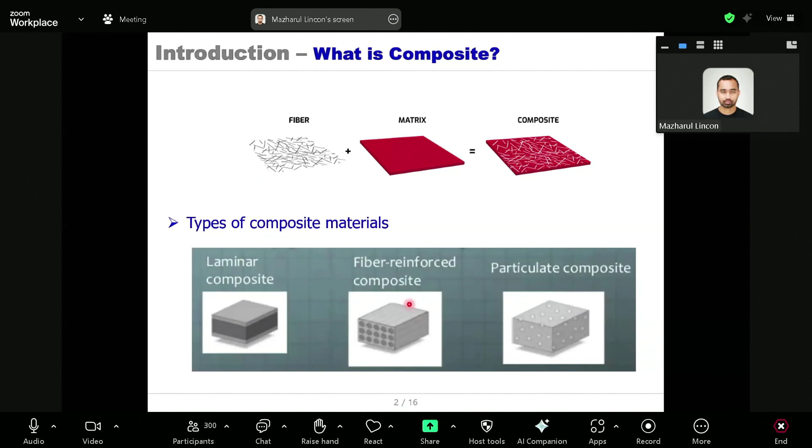In this study, we considered the fiber reinforced composite. Now, composite materials are becoming very popular in electronics, automotive, aerospace, and submarine industries.

Automobile structures and wheel rims are nowadays made by composite material, carbon fiber composite. In airplanes, composite materials are largely used - like Boeing 787, almost 90% of this airplane's body is made by composite material, carbon and fiberglass material.

And even in submarine industries, composite materials are gaining popularity. Super Falcon 3 submarine is made completely by composite material.

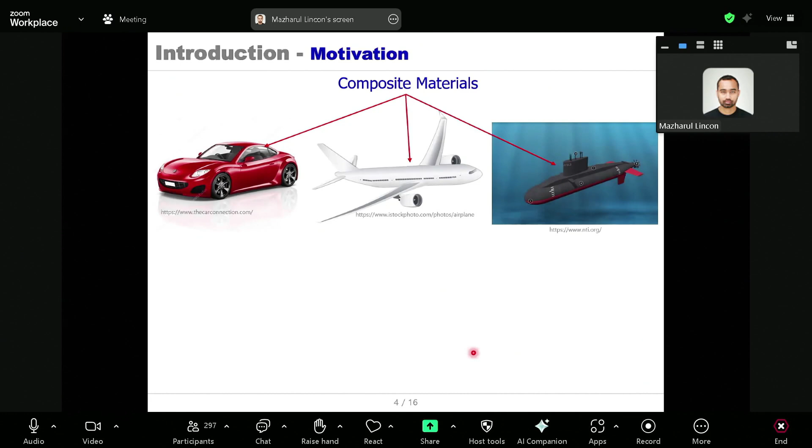Now, composite materials used in different commercial and defense applications demand superior performance under quasi-static, dynamic, and impact loading conditions. However, mechanical performance of composite materials can degrade in different ways.

For example, car accidents, bird impacts on airplanes, or water impact on submarines. So there has been significant interest in the recent past in continuous structural health monitoring of composite structures. This study will provide a better understanding of mechanical performance and damage monitoring capabilities of hybrid composites under dynamic loading conditions.

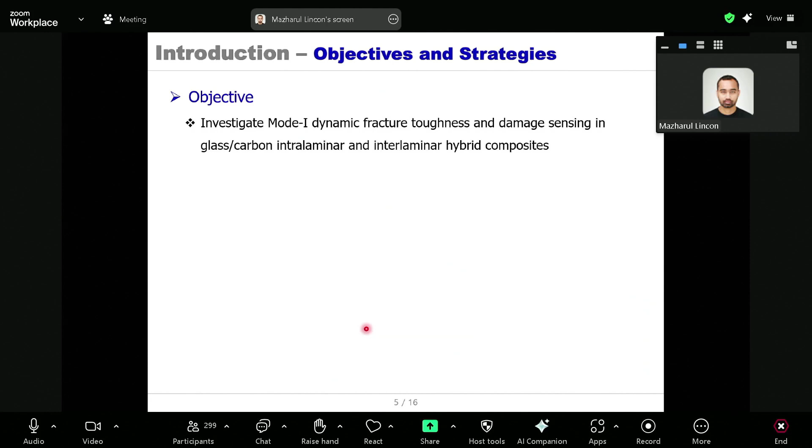The main objective of this research is to investigate mode-one dynamic fracture toughness and damage sensing in glass-carbon intralaminar and interlaminar hybrid composites.

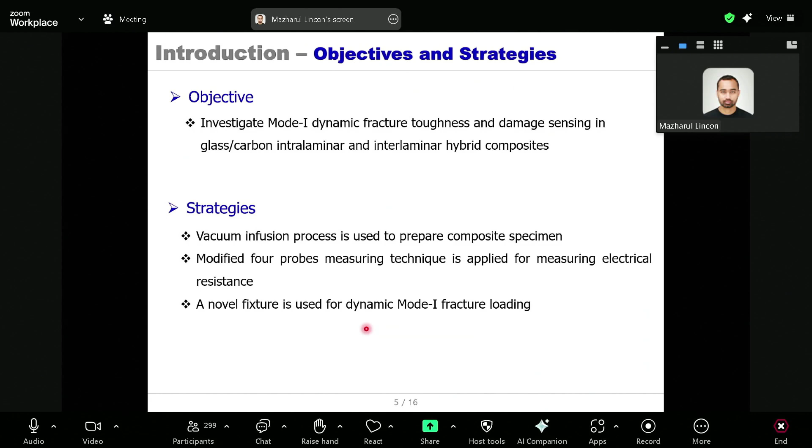The strategy we followed: a vacuum infusion process is used to prepare the composite specimen. A modified four-probe measuring technique is applied to measure the electrical resistance of the specimen, and a novel fixture is used for dynamic mode-one fracture loading.

Two types of hybrid composites are considered in this study: one is interlaminar hybrid composites, another is intralaminar hybrid composites. What is interlaminar hybrid composites? Interlaminar hybrid composites form between two different plies, glass ply and carbon ply, stacked one by one to create the hybrid composite.

On the other hand, in intralaminar hybrid composites, within a single ply, the carbon and glass yarns are formed evenly, and this even ply is stacked one by one to create the intralaminar hybrid composite.

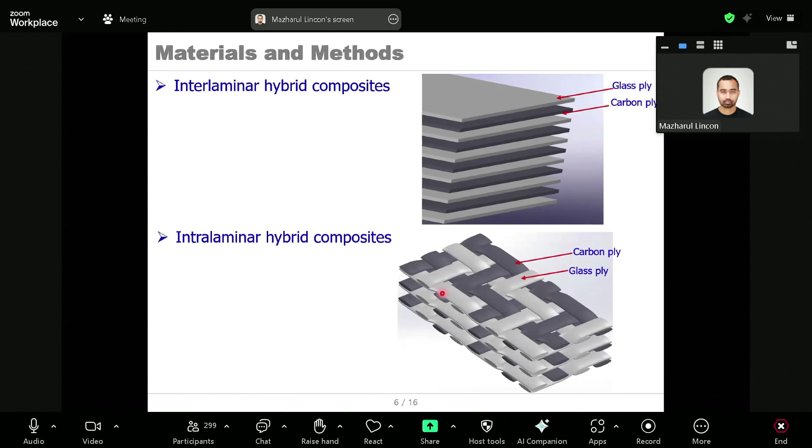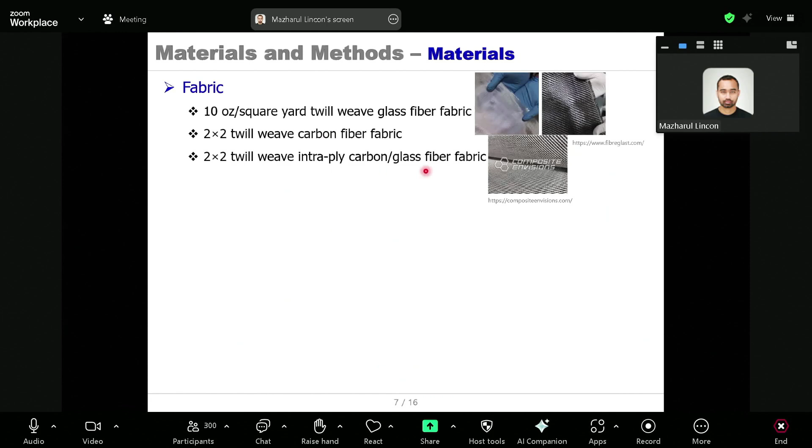The material used for this study is twill glass fiber fabric, carbon fiber fabric, and hybrid glass-carbon fiber fabric. The resin used is fiberglass epoxy resin and hardener. Multi-wall carbon nanotubes are used to make the interlaminar hybrid composite conductive.

Now the composite specimen making procedure. Here, vacuum assisted resin transfer molding process is used to prepare the composite specimen. This vacuum assisted resin transfer flow diagram is shown here.

This black one is just the Teflon board, and this gray one is the composite ply stack. This composite ply is covered with peel ply, flow media, and the vacuum bag, and the overall system is sealed with gum tape. From this inlet, resin passes through the composite specimen, and the excessive resin goes out through the outlet.

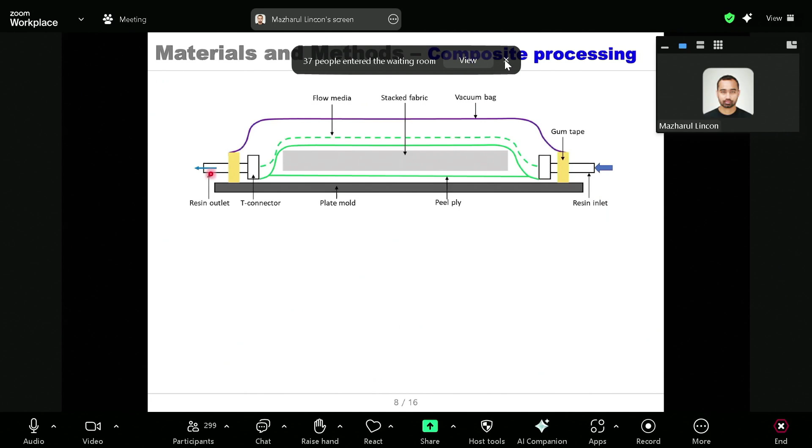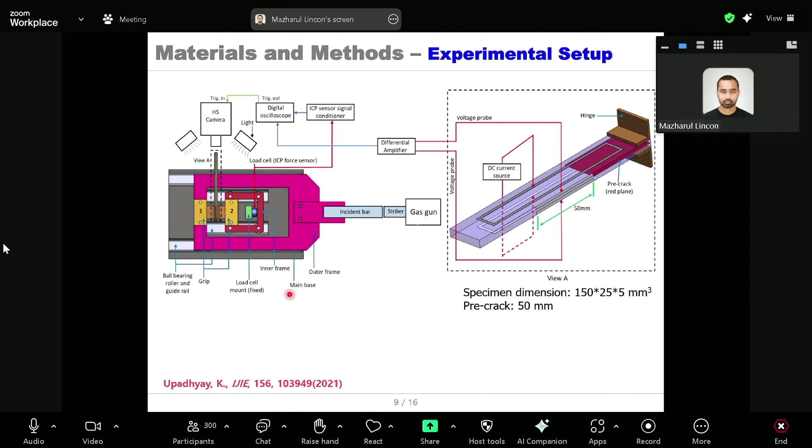The crack initiation toughness force is measured through a force sensor. This blue schematic diagram is shown as a sensor, and a high-speed camera is used in front of the fixture to capture the whole incident.

Now this is the schematic of this fixture. This is the outer frame, then this is the DCB specimen. One end of the DCB specimen is attached with this outer frame, and another end is attached with this inner red one frame. And this gray one is a projectile.

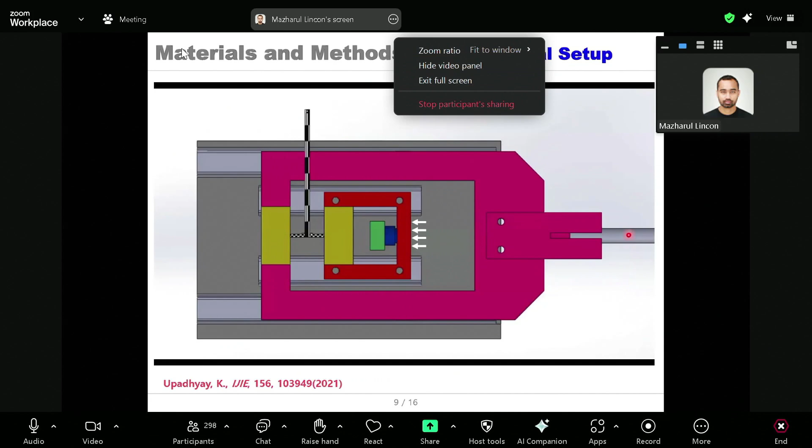When this projectile hits this outer frame, it starts moving, and it creates the opening of this DCB specimen. During this time, this inner frame also tries to move, and it creates force on this blue load sensor. This load sensor is connected with the oscilloscope, which captures this load, which is actually the fracture initiation toughness.

Now, this is the real image of this fixture, and this is the whole entire setup. This is the high-speed camera, oscilloscope, and the fixture and the specimen.

Now, this interlaminar hybrid composite, we use two types of interlaminar hybrid composites. One is G-inter, another one is C-inter. The basic difference between these two specimens is these specimens are made by a total of 10 ply, and the middle ply is glass fabric. In the C-inter composite case, the middle 2 ply is carbon fabric.

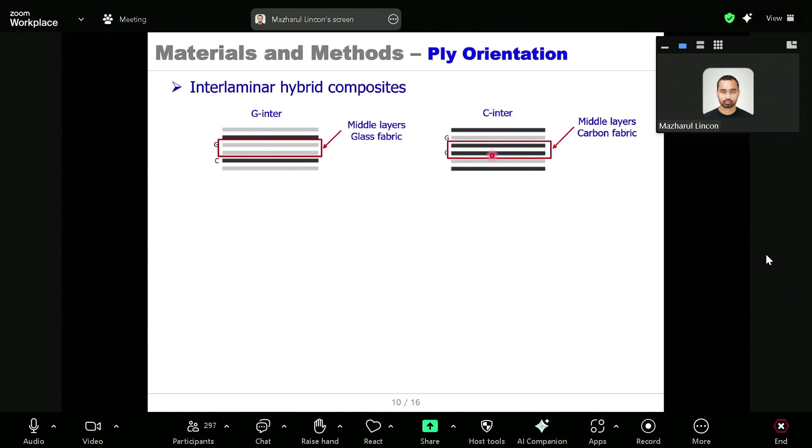For this intralaminar hybrid composite, 4 types of specimens are considered. The first one is G0C90. G0C90 means the glass yarn will be parallel to the crack initiation direction. The opposite is G90C0, here carbon yarn is parallel to the crack initiation direction.

Another 2 types of specimens are used, G45, C45. The basic difference between these 2 specimens is both yarns are in 45 degree direction in the crack initiation.

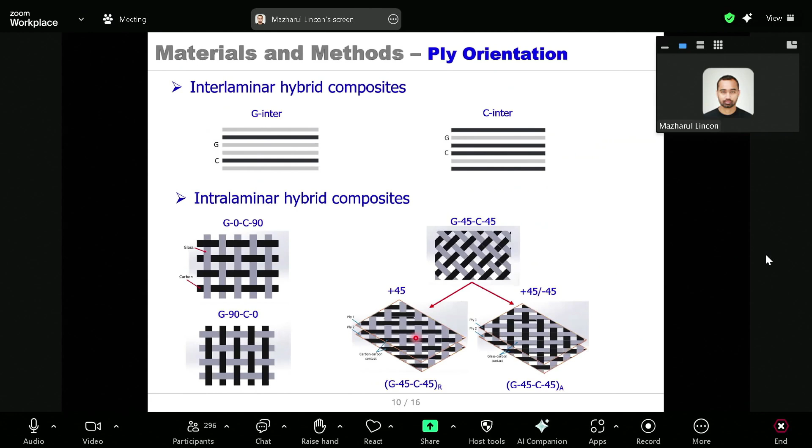Now I will discuss some key results of this research. We did both dynamic and static experiments, but in this presentation I will focus on only the dynamic results.

Here are the 4 types of intralaminar hybrid composites. G90C0 shows the highest fracture initiation toughness. On the other hand, G45, C45 alternating shows the lowest. Between the interlaminar hybrid composites, G-inter shows the maximum fracture initiation toughness compared to C-inter.

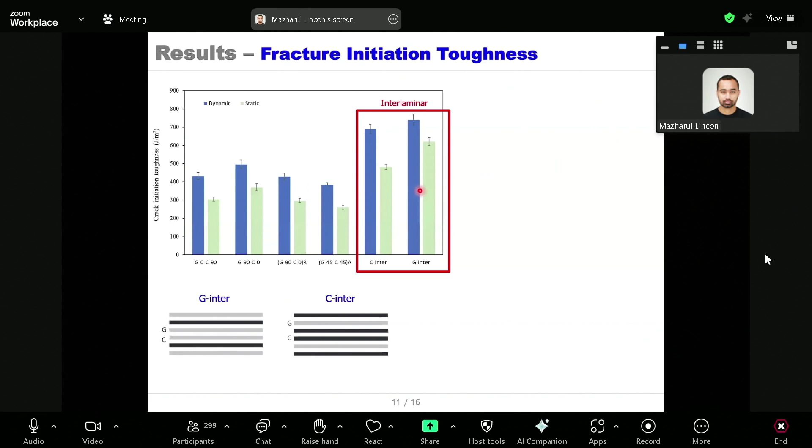Now the question is why the fracture initiation toughness varies among the 4 intralaminar hybrid composites as well as interlaminar hybrid composites. To find out the reason, we did scanning electron microscope analysis on the fracture surface of each composite. This is the scanning electron microscope images of 6 types of composites' fracture surfaces.

The first one is intralaminar G90C0. Here, carbon fiber breakage is the predominant failure mechanism, and this carbon fiber breakage is actually the main reason for showing the high fracture toughness for this composite type.

On the other hand, in this G0C90 case, glass fiber breakage happens as well as fiber-matrix debonding and matrix cracking. However, no carbon fiber breakage is observed in this composite type. As we know, carbon fiber needs much higher load to break than glass fiber. That's why this G0C90 composite shows less fracture toughness value compared to G90C0.

Now, another 2 composite types are G45, C45 repeating and alternating. In these 2 composite cases, the carbon yarn and glass yarn are at 45 degrees through the loading direction, and this 45 degree layup is not an effective orientation to carry higher load. That's why with a smaller force, the carbon fiber or glass fiber breakage happens because of this ply orientation, and that's why it shows less fracture toughness compared to the first 2 composite types.

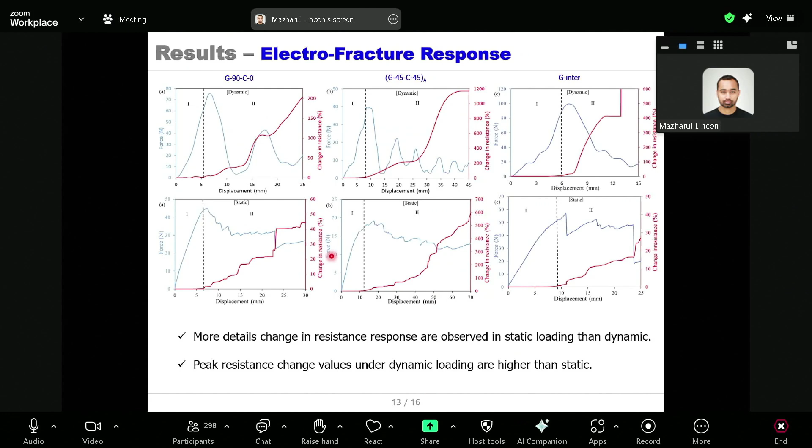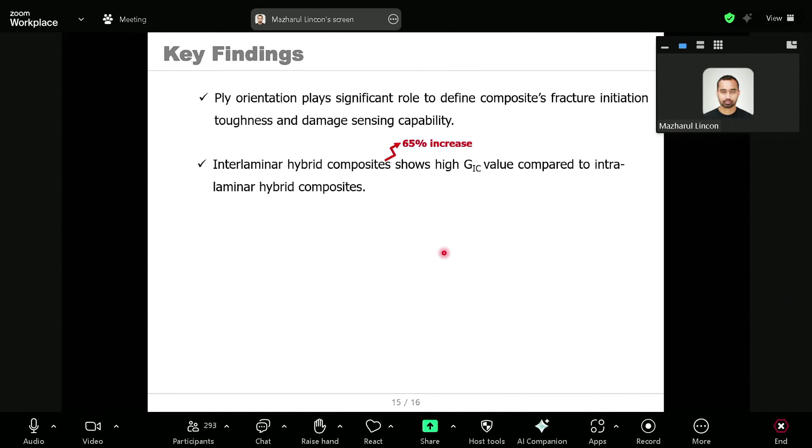The key findings of this research show that ply orientation plays a significant role in defining composite fracture initiation toughness and damage sensing capability. Interlaminar hybrid composite shows high fracture initiation toughness compared to intralaminar hybrid composites, around a 65% increase, while intralaminar hybrid composite shows better damage sensing capabilities, around 800 to 1200% change in resistance. The proposed modified four-probe method can predict crack initiation and propagation accurately for all composite types.

In this research, we use intralaminar hybrid composites. The main advantage of this composite is we don't need to use carbon nanotubes to make it conductive. We can use this composite directly in any damage sensing structure, and analyze the damage sensing capability for structural health monitoring. Carbon nanotubes are very hard to disperse uniformly in resin, making it difficult to create a uniform conductive specimen. But this intralaminar hybrid composite can itself create a good conductive network.

This intralaminar hybrid composite, for G45, C45, 45 degree orientation ply, shows very good damage sensing capability as well as out-of-plane deformation. So this material can be a good candidate to make airplane wings or wind turbine blades, and it can also be used for continuous structural health monitoring to maintain structural stability.

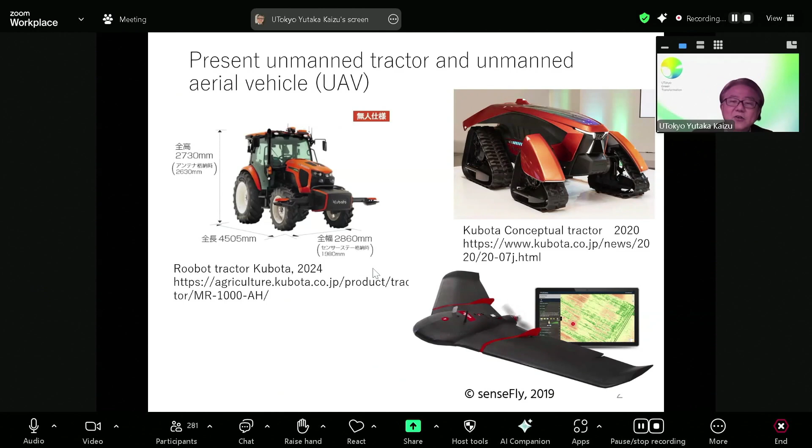Let me briefly introduce myself. I was born in Tokyo, and after completing my master's degree, I worked at Kubota, the largest agricultural machinery company in Japan, for 2 years. After that, I became a faculty member at the University of Tokyo and Hokkaido University, and I'm currently based at the University of Tokyo.

I first met Professor Oscar Baravich Jr. during my time at Hokkaido University. My main areas of research are agriculture, robotics, biomass energy, and smart utilization of animal power in agriculture. That is my specialty.

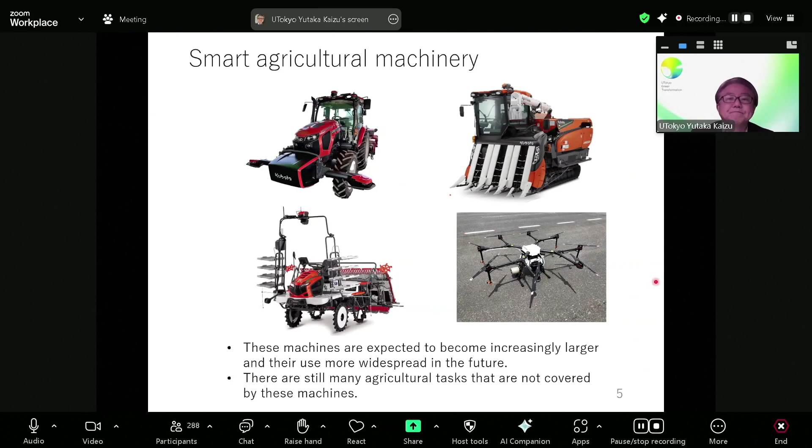Robots can also be used for so-called post-harvest operations, such as conditioning, selection, and boxing. In addition, farm management activities like planning, fertilizer management, growth measurements, and yield prediction are also becoming increasingly automated thanks to modern technologies like AI and ICT.

Mowing around the farmland, which is very labor-intensive work, is another area where robots are expected to play a bigger role in the future. Also in orchards or greenhouses, most tasks are still done by hand, and these are also expected to be automated in the coming years, like bud picking, fruit thinning, pruning, or harvesting.

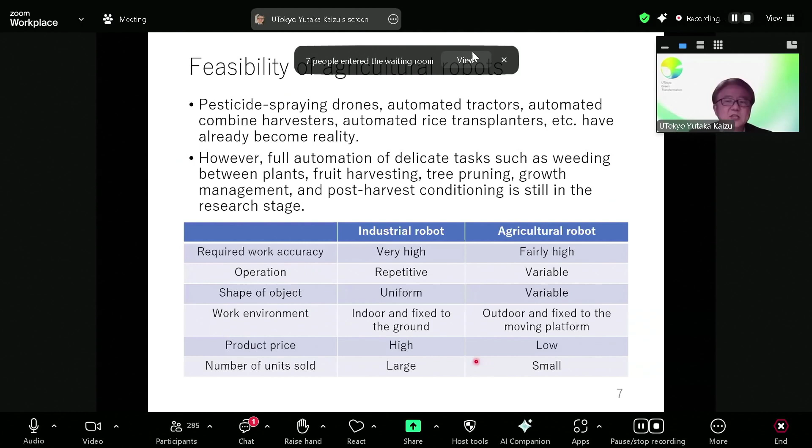These problems are expected to be overcome by new technology, especially advances in AI and robotics. However, there can still be major obstacles to the realization of agricultural robots. I believe that this is exactly the kind of challenge agricultural engineers like myself should take on, and it's also a great topic for university students to work on.

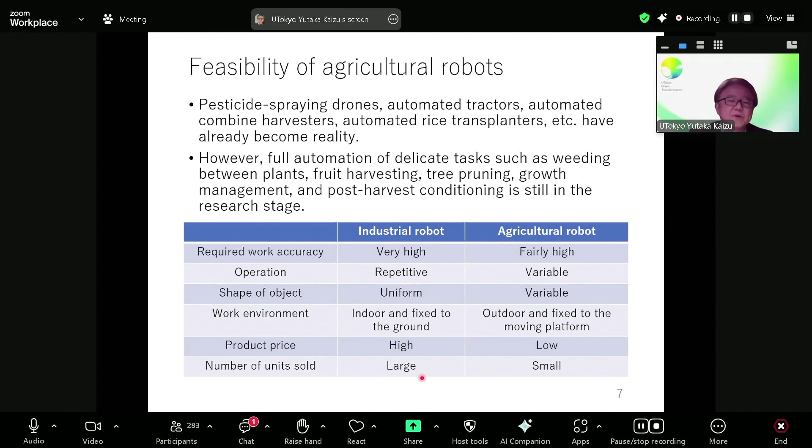There are a number of issues that need to be addressed when it comes to small agricultural robots. Today, I'd like to share a few examples of what we are working on in our laboratory. First, I will introduce an outdoor robot, a weeding robot for mowing the ridges around rice paddies. Next, I'll talk about the weeding robot that operates inside the paddy fields. Then I'd like to explain our automatic mowing robot for orchards. And if time allows, I'll also talk about the pick and place robot we use indoors to help with dried persimmon production.

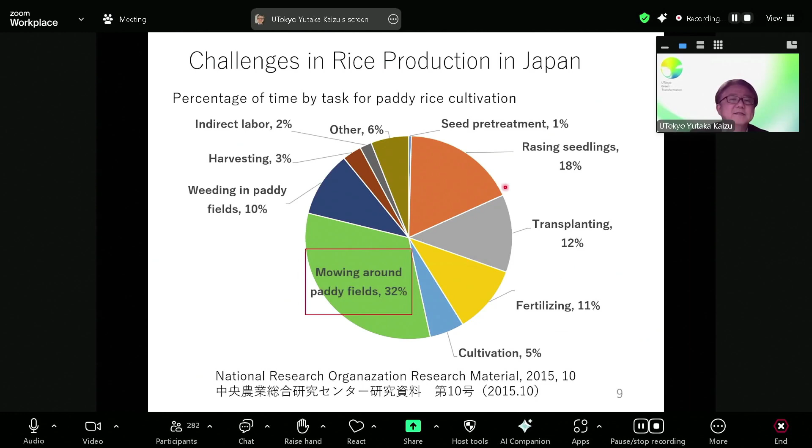With the help of a remote controlled mower, people can operate the machine safely from a distance. In our laboratory, we are developing a weeding robot for slope terrain, like the banks between rice fields. This is a joint research project with Sanyo Kiki, a private company, and we built the automatic driving controller using a commercially available mower as a base.

For this robot, we use two low-cost RTK GNSS units to accurately measure both position and direction, even on slopes. With this setup, the mower was able to follow the contour line on the slope with an error of just 7 centimeters—something that's very difficult to do by hand. RTK GNSS units used to be very expensive, but now they are much more affordable and are being used for all sorts of applications, like drones and agricultural machinery for navigation.

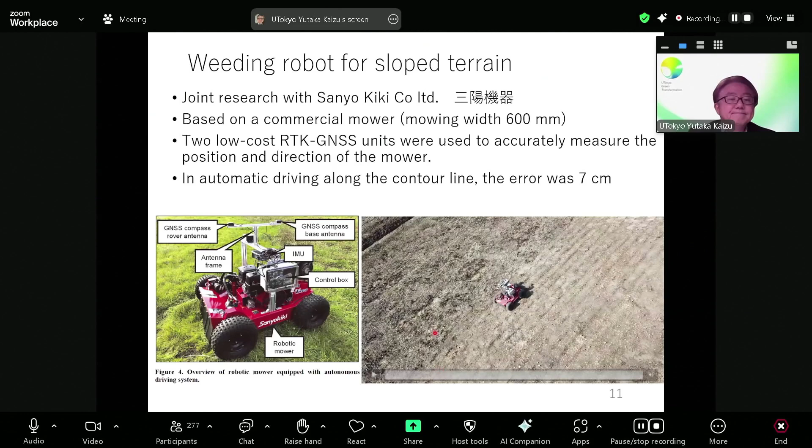We started to wonder, could we prevent the robot from tipping over or slipping by changing the shape of the tractor's chassis to match the slope, like this tractor? This is a prototype we developed. The body frame of this vehicle automatically tilts to match the slope of the ground, keeping the center of gravity between the left and right crawlers at all times. The tilt angle is automatically adjusted in real time by a linear actuator installed here, and we've also installed an inclination sensor, which allows this frame to always stay perpendicular to the ground.

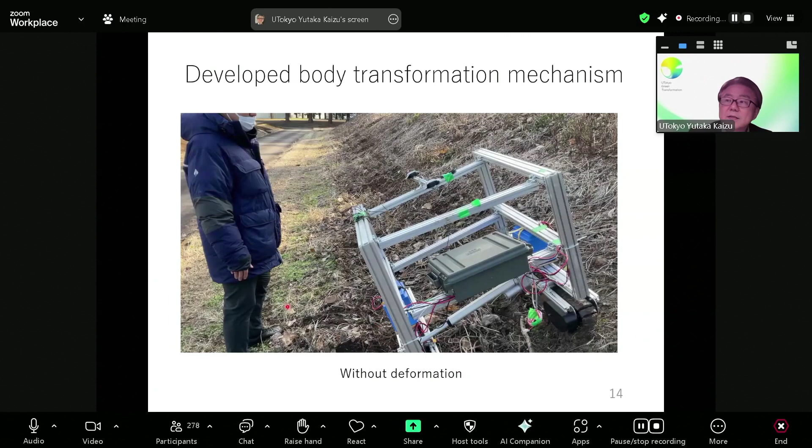This video shows our prototype operating automatically on a slope. First, here's what happens without any chassis transformation. Because of the tilted slope, the center of gravity shifts downhill, making the machine almost tip over. Also, since it's always skidding downhill, we have to keep the nose of the vehicle pointed uphill at all times. Let me show it one more time.

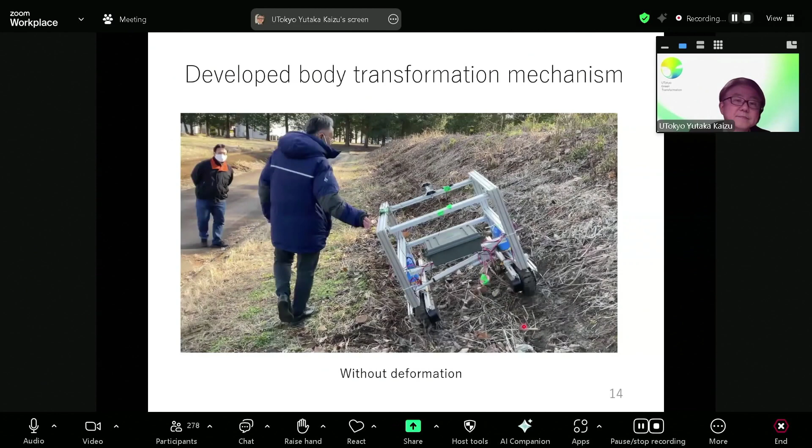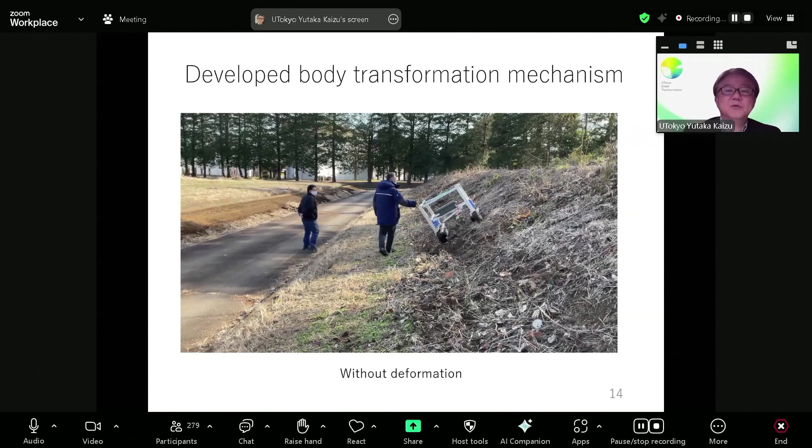Now this video, on the other hand, shows a prototype with tilt compensation. Compared to the case without tilt adjustment, it's much more stable on the slope. Let me show you the video—skidding is greatly reduced. Right now, we are working on a machine that can handle slopes of up to 45 degrees.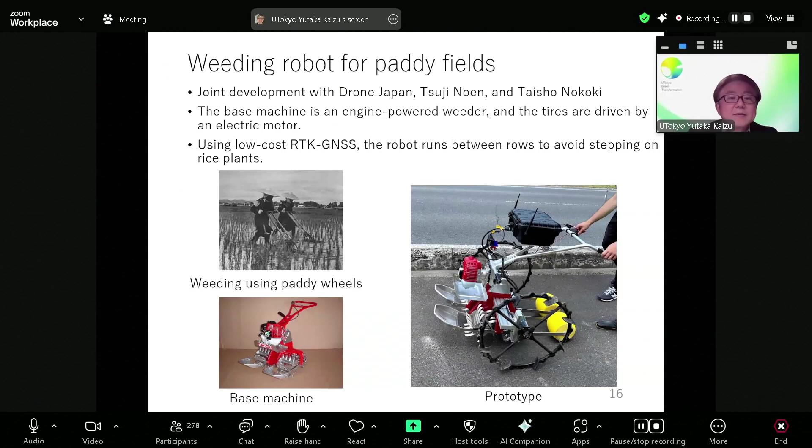Here's a video of the weeding robot operating automatically. Right now, there are two ways to set the robot's route. Let me stop here.

Right now, there are two ways to set the robot's route. First, run the robot manually once and record the route. Second, detect the position of the rice rows from drone photos.

It's actually quite difficult to keep the robot running smoothly in a paddy field because the mud creates a lot of resistance, and field conditions can vary a lot from place to place. Another issue is that sometimes the seedlings get crushed when the robot turns, which is also a challenge we need to address.

Next, I'd like to introduce a mower that can be used in orchards. In orchards, GPS signals are often blocked or absorbed by branches and leaves, which makes accurate positioning very difficult.

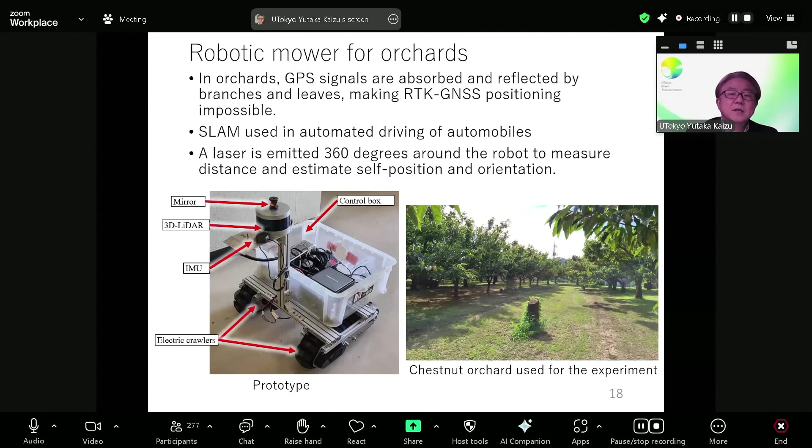This video shows the actual autonomous vehicle driving through the chestnut orchard. Here you can also see a simulation of a real-time self-positioning process.

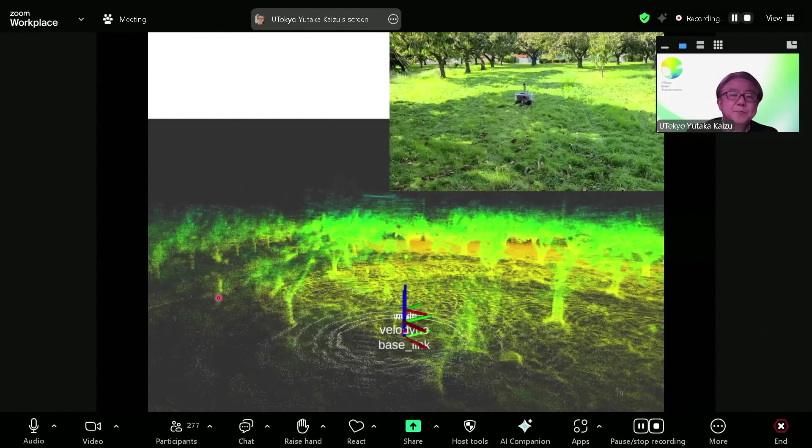The colored points, green and yellow, represent the 3D map, while the white points around the vehicle are the point cloud data from the 3D LiDAR sensor. By matching the real-time LiDAR data with the map, the system estimates the vehicle's position.

The experiment was very successful in a small area.

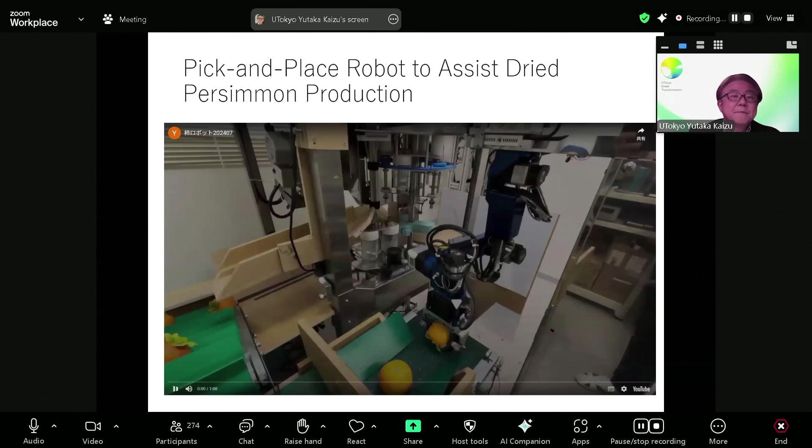Let's see. It picks up the persimmon here, corrects the orientation, and places it here, like this.

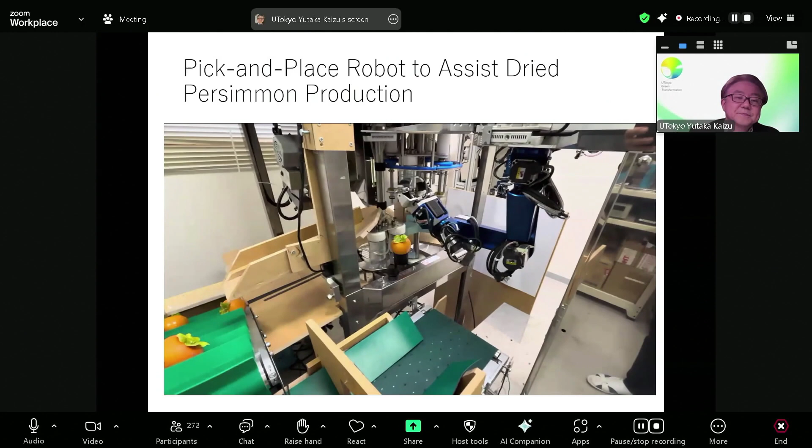This video shows how the image processing works. First, the system detects the orientation of each persimmon as it moves along the conveyor and delivers it to the peeler.

To place each persimmon in the correct position and orientation for the peeler, we use image processing based on deep learning.

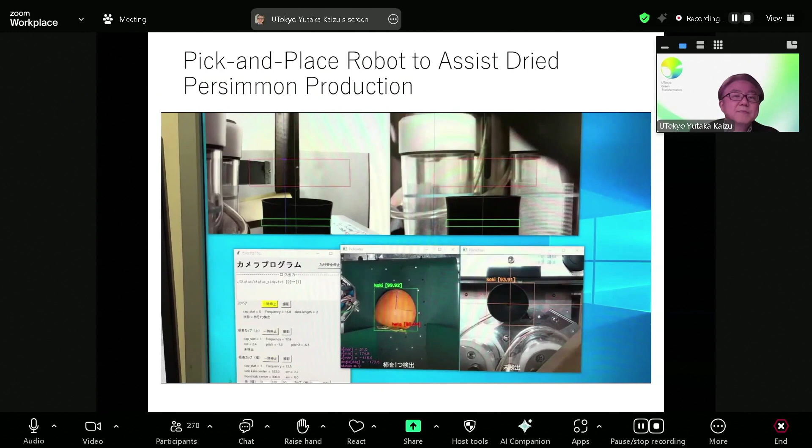Okay, so let me conclude my presentation.

Finally, I would like to share my thoughts on the realization of small smart agriculture robots. First of all, drones have been very successful in the agriculture field, but this is a very exceptional case, and the small ground-based robots I am working on still face many challenges. However, it is not at all impossible to realize.

First of all, we need to actively adopt new technology developed for drones and self-driving cars. In fact, the sensors required for autonomous driving, such as LiDAR, are steadily becoming more affordable.

In addition, it is necessary to improve the performance of batteries. A hybrid system and fuel cells can also be used.

We also believe it is necessary to develop new farming methods. In order to work efficiently with small machines, it will be necessary to develop ultra-precise farming methods that perform the necessary work only where it is needed.

We also believe that it is necessary to strengthen communication networks in rural areas.

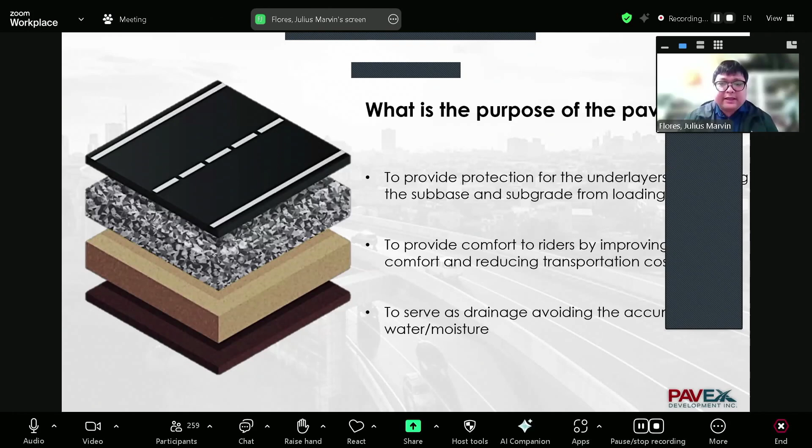When we talk of pavement engineering, it involves several things. It starts from the laboratory mixture design, where we determine the optimum binder content, optimum asphalt content, or optimum water-to-cement ratio. After the mix design is finished, it goes to the asphalt plant, which uses the mixture design we developed in the laboratory to manufacture it at a bigger scale. After manufacturing, construction proceeds, involving compactors and asphalt pavers.

After constructing the pavement, pavement engineering doesn't stop there. It starts as soon as the pavement is open to traffic, because as a pavement engineer, we monitor its life and rehabilitation methods or options to prolong its life. When we talk of pavement rehabilitation, we want to evaluate first the present condition of the pavement — its structural condition, modulus value, geometry, whether it's thinner or thicker than the previously constructed design, and the ongoing distresses the pavement is experiencing, such as cracks and rutting.

When I say rutting, it's about 'lubak' in Filipino. So we talk about cracking, rutting, potholes, patches, and more — this is what we do in pavement engineering. We monitor and evaluate pavement distresses, meaning the defects that are occurring on your pavement, which can be in the form of cracking, rutting, potholes, patching, and other forms of distresses you can see on your pavement.

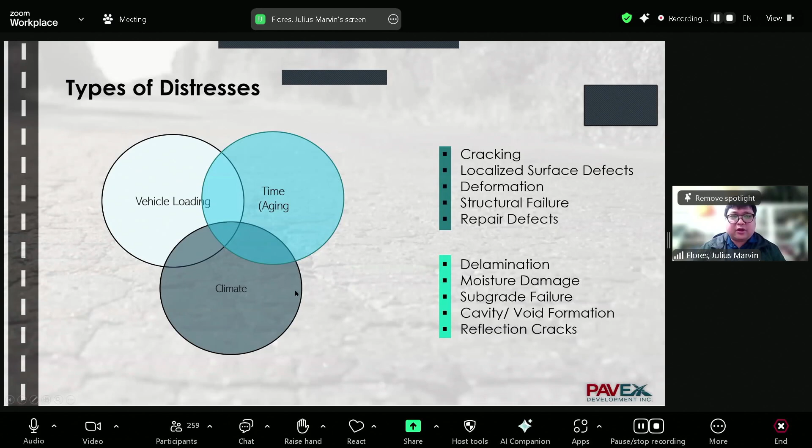Basically, this type of crack occurs because of three parameters. The first is vehicle loading, due to traffic loading. If the traffic loading increases, there is a high chance of distress occurring. The second is aging - like us as individuals, we age, so the pavement mixture also ages through time. And also since it's exposed to climatic conditions such as rain, sun, and moisture, climate is also one main parameter in distress occurrences.

I would like to discuss first how cracking mechanism works. For cracking mechanism, there are two types: bottom-up cracking and top-down cracking. If the crack initiates from the bottom and progresses upward to the pavement surface, it's called bottom-up cracking. If the cracking occurs from the top and penetrates down to the bottom of your pavement, it's called top-down cracking.

But the question is, how can we determine which type of crack is occurring within a pavement? If the crack width is very thick, it's usually top-down cracking because the cracking starts from the top. But if the crack is very thin, then probably it's bottom-up cracking. However, there's no standard or guideline in determining which type of cracking is occurring on the pavement.

But I would like to discuss why this type of cracking occurs. For bottom-up cracking, it occurs if you have insufficient pavement thickness. This means that the thickness of your current pavement is very thin and cannot handle the current load, so bottom-up cracking can happen.

For top-down cracking, the pavement can handle your traffic loading. However, it is exposed to environmental conditions - exposed to weather, flooding, water, and heat. That's why top-down cracking happens.

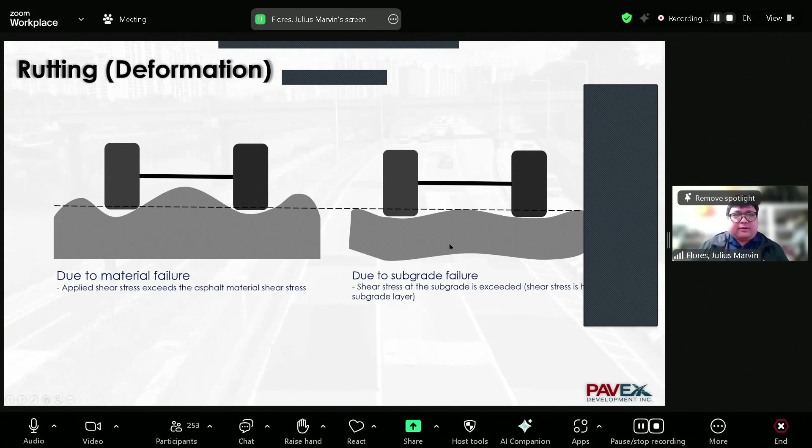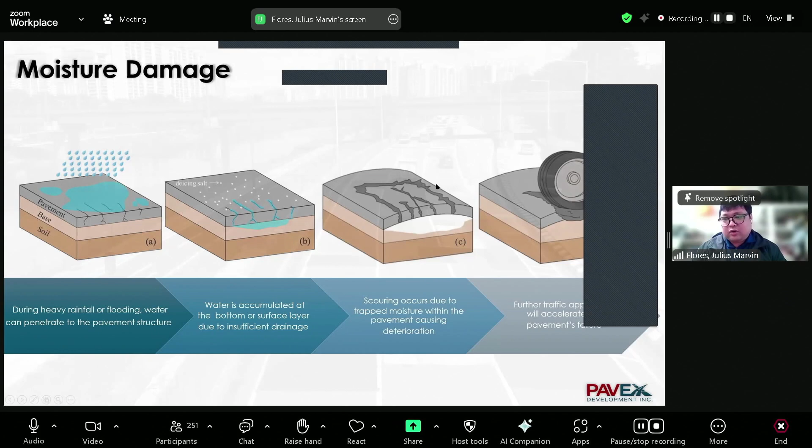So if we have a material or pavement that is fully bonded and has very good drainage capacity, then there can be lower chances of pothole occurrences. But again, since the Philippines is prone to flooding, there is a high chance of pothole occurrences due to this mechanism.

Finally, in pavement engineering, we also measure roughness. Roughness is the vertical displacement over a certain horizontal displacement. This is usually related or correlated to the comfort experienced by the rider of the vehicle. This is called the International Roughness Index, which is a measure to determine comfortability and safety of the vehicle.

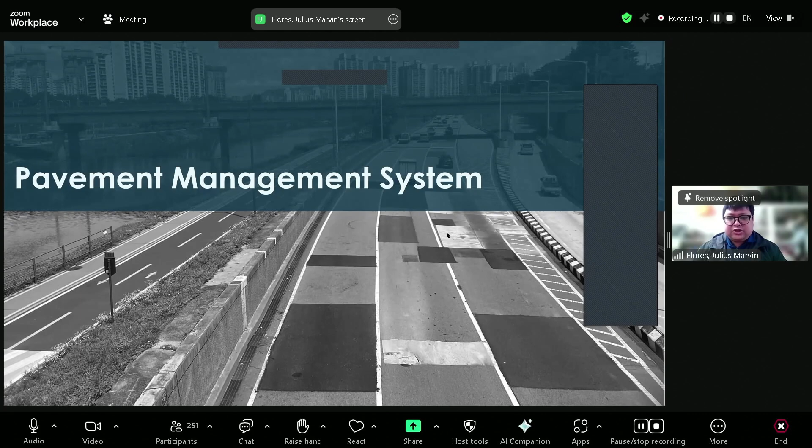In pavement engineering, we also have pavement management systems. Just as civil engineering has project management, pavement engineering has pavement management. There are different levels: the strategic level, the network level, and the project level.

The strategic level is usually policy making, done by the higher agency or national government. For the network level, we determine the appropriate budget for each region, for example Luzon, determining each region's need for road construction. For the project level, we determine the need of each district or locality for road construction budget. These are the levels for pavement management, requiring different tasks and obligations from the agency.

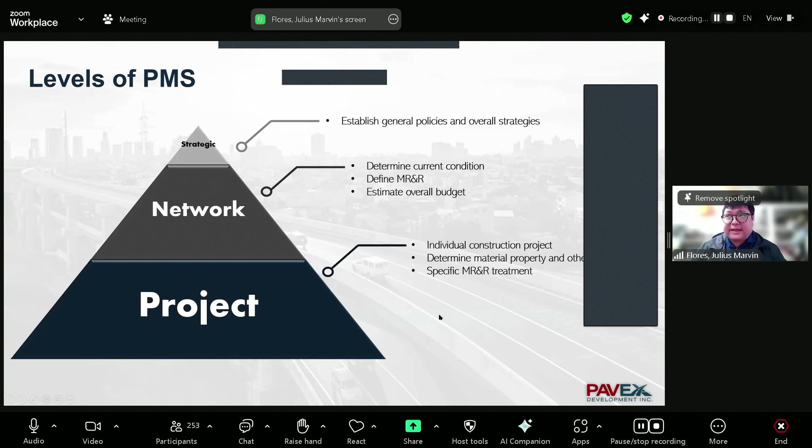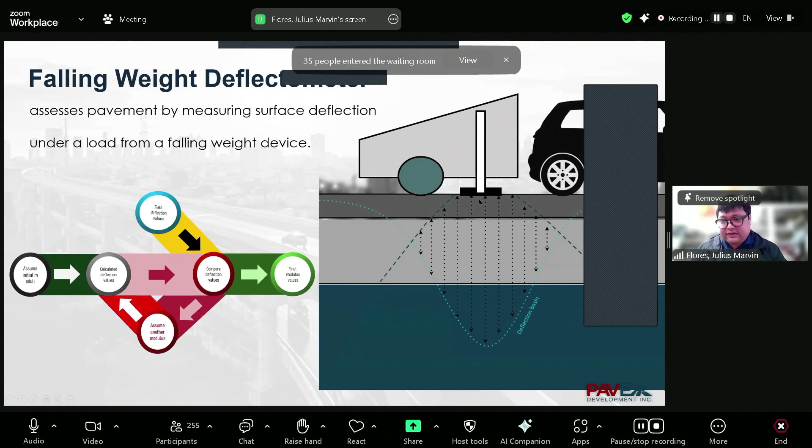So how can we apply artificial intelligence in pavement engineering? I just discussed the basic concepts of pavement engineering. In artificial intelligence, we can use images, videos, audio, Internet of Things or other hardware, even documents and databases. No doubt we can apply artificial intelligence into pavement engineering.

When we talk about artificial intelligence, we simulate or embed human intelligence into our technology. As I presented, we have the ground penetrating radar and the falling weight deflectometer, and some researchers have already applied AI in those devices. But this morning, we will apply artificial intelligence differently.

When we talk of machine learning, it can be supervised or unsupervised. In supervised learning, we tell the computer by labeling and classifying images, for example in pavement, classifying cracked and uncracked images, and then feed it to the machine. In this case, the machine learns by itself.

For unsupervised learning, we don't classify cracked and uncracked areas; we let the computer or machine learn by itself. The difference: supervised learning has a higher chance of higher accuracy, but the downside is it needs time for labeling data and may tend to overfit, meaning your algorithm works for your database but not for another. For unsupervised learning, you don't need to label data and less manpower is needed, but the problem is lower accuracy.

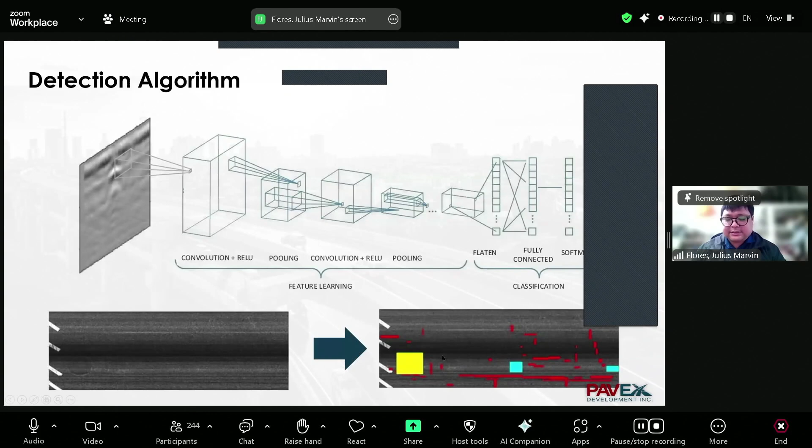Another one is the detection algorithm, which uses supervised or unsupervised learning. In pavement engineering, we train images like this one, a plan view of a road map, to detect cracks and non-cracks, or potholes and patching. After training several algorithms and optimizing your network, you can develop a machine learning program that can detect cracks and classify them into different levels.

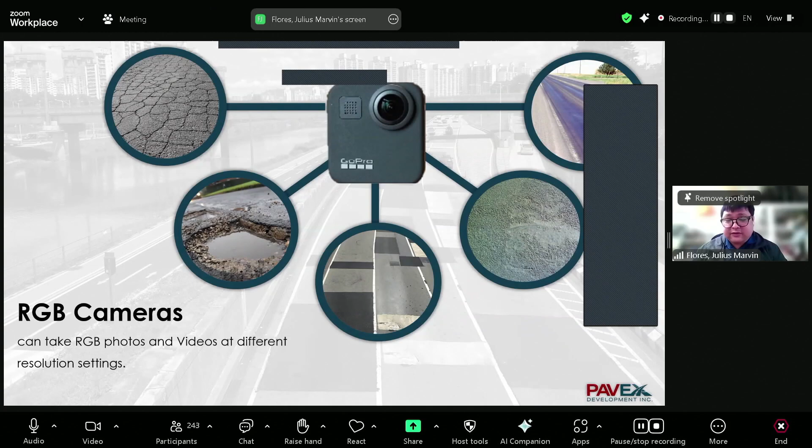Currently, our company is utilizing RGB cameras such as GoPro that can take photos and videos at different resolution settings. We also use laser cameras, wherein the camera profiles the current condition of your pavement to determine if there is rutting existing or not. We also use drones to detect different distresses.

For example, bridges are difficult to survey, especially under the deck. So we can use drones by attaching cameras to them and doing the survey. We can also do wireless communication by using a Raspberry Pi, attaching it to a camera, and attaching it to your vehicle.

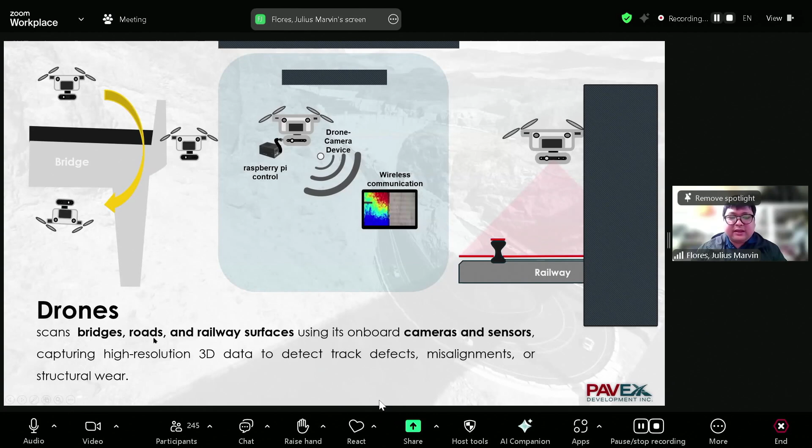In pavement engineering, we are not limited to pavement alone. We can also use railways as our test bed, attaching cameras to drones to do digital surveying. Using drones, we can survey different types of infrastructure such as bridges, roads, and railway surfaces.

So now for the application. This is a simple application that I developed using a GoPro camera. What I did was use the camera, choose a survey section, and then apply some algorithm to stitch the images to develop a road map.

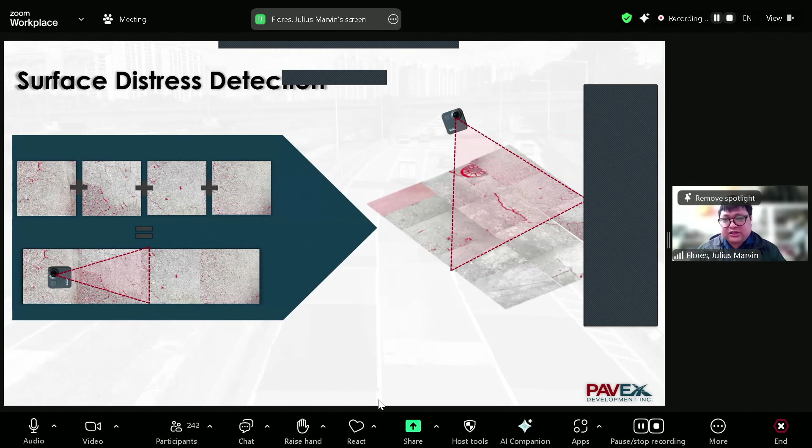In this road map, I applied a machine learning algorithm again to detect cracking, manholes, and potholes. As you can see in this sample, the cracks are detected by the red pixel. Using a very simple and low-cost camera, you can develop your own detection algorithm in the university.

What I did was start with raw data and do some background removal, so that we can focus on the area of interest. Once we remove the background, we can analyze that area and do some binarization. Finally, we can detect the anomalies or the crack occurrences.

So what it does is, once it hits the object, it reflects back to the camera, and it uses triangulation in determining the depth or height of the object.

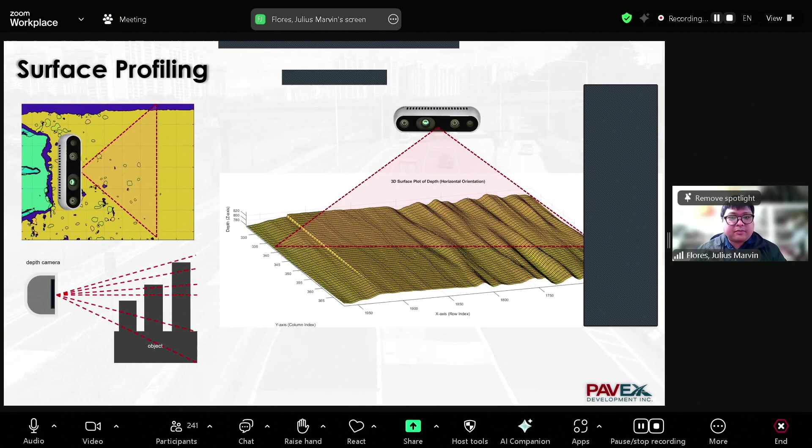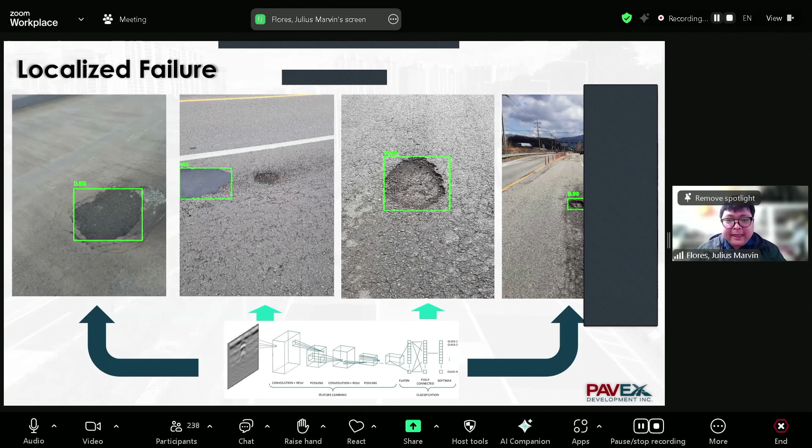This is another algorithm we developed to detect localized failure for patching and pothole occurrences. We labeled several images of patching and potholes, maybe around 2,000 images, then trained the model to develop an algorithm that can properly detect the occurrences of such distresses. In your university, you could try to develop a huge database of potholes and patching and apply machine learning.

For moisture detection, using ground penetrating radar, we try to find anomalies in the behavior of the signal. Then, using machine learning, we don't need another program — we just apply machine learning to detect moisture occurrences within our subsurface or pavement structure.

For delamination detection, same as moisture, we try to find an anomaly within our radargram or signals. We try to find a pattern that we can feed the machine so that it can learn by itself, so that in future surveys it can automatically detect these anomalies within our acquired radargrams.

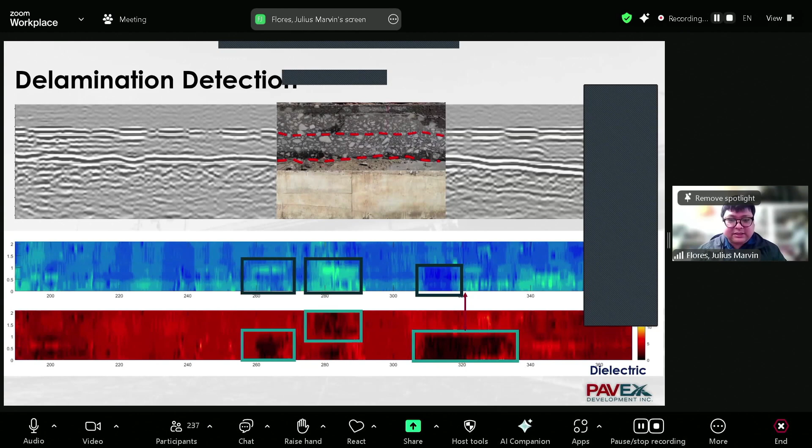For cavity detection, we look for parabolas that indicate anomalies, but the problem is some parabolas could be pipes, and some could be aggregates. So we developed an algorithm determining which type of parabola is a pipe, which is a cavity, or which is an aggregate.

And then in the end, we develop a proper algorithm for this detection.

So lastly, to end my presentation, applying artificial intelligence in different fields of profession is very essential and highly needed as we tend to adapt with the technological advancement ongoing in our society. By combining artificial intelligence, Internet of Things, machine learning, and technology, you can develop a more creative approach in solving different problems, especially in pavement engineering as I discussed this morning. So I think this will be the end of my presentation. If you have some questions, I would be glad to entertain them. So thank you.

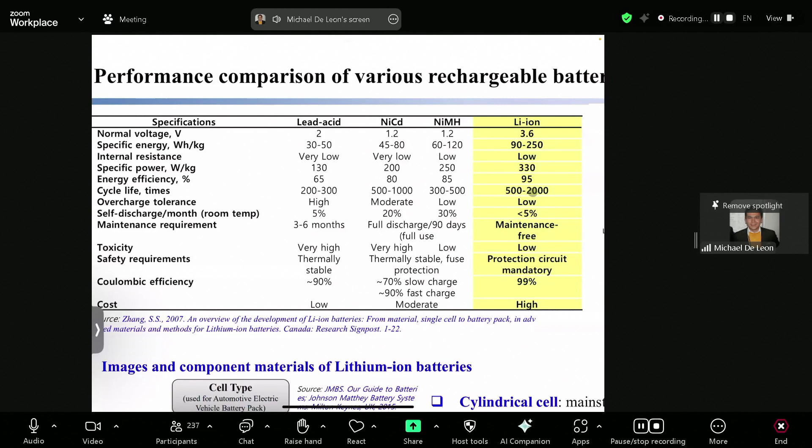There are different types of cells. The first is the cylindrical cell, which is the mainstream of battery cells, popularized by Tesla cars with their 18650 batteries. Another type is the prismatic cell, which has a solid container, normally made of steels or alloys. The third type is actually a variant of the prismatic cell, but encased in a pouch.

Common to all cell types of lithium-ion batteries are the stack electrodes, typically made of thin foils. These are connected to tabs, and among the different cell types, the pouch cell is being considered in electric vehicles due to its lightweighting capability, better volumetric energy density, and high spatial efficiency.

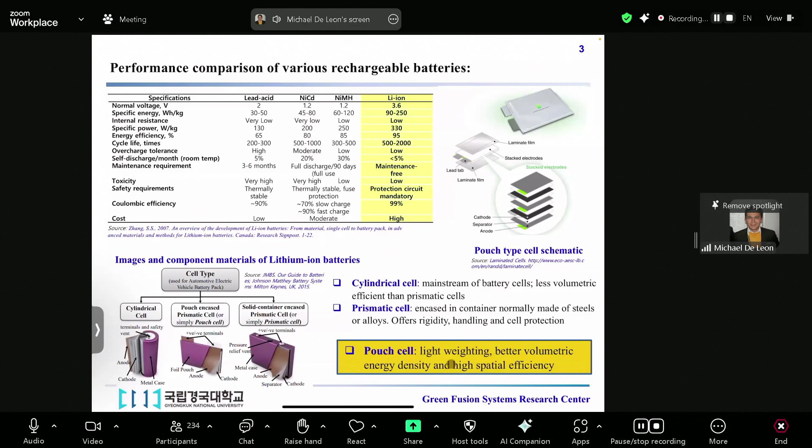Here's the challenge: the manufacturing process of joining these multiple layers of foils to a tab has been very difficult, because we are not just joining different materials like copper and aluminum, they also have different thicknesses, and any single weak joint can compromise the entire battery pack and disable the entire battery system. In addition, poor weld quality, like unbonded interfaces, cracks, and defect-related problems, can cause energy loss by Joule heating due to increased resistance. So reliable joining for these batteries is very essential for EV applications.

So these are current battery joining technologies for these specific batteries. When we compare these joining methods, resistance welding struggles with highly conductive materials. Laser welding needs perfect alignment and a shielding gas. Mechanical joining adds more weight and can be labor intensive.

So why ultrasonic welding? It handles dissimilar materials really well, and it can work in a fraction of a second. Crucially, it doesn't create heat-affected zones that can damage battery components, since it is a solid-state process.

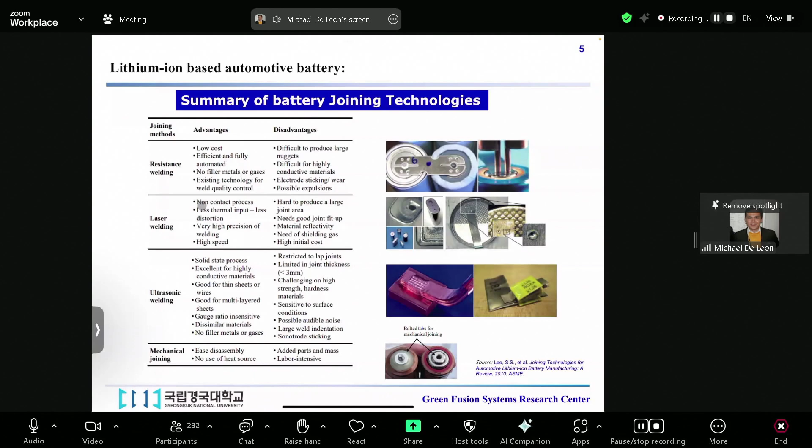So as pointed out, among the several joining methods, one stands out: ultrasonic welding. As background, this process was first patented in the 1950s, mainly for tube sealing and wire joining. It was then applied to metallic materials during the 1960s, and recently extended to structural components such as automotive body frames.

Ultrasonic welding, or UW, is very capable of welding thin layers and dissimilar highly conductive materials like copper. It does not require any sealant, inert gas, or filler metals. And of course, it can avoid typical metallurgical defects at the heat-affected zone, because technically there is no heat-affected zone, since the process is within the solid state.

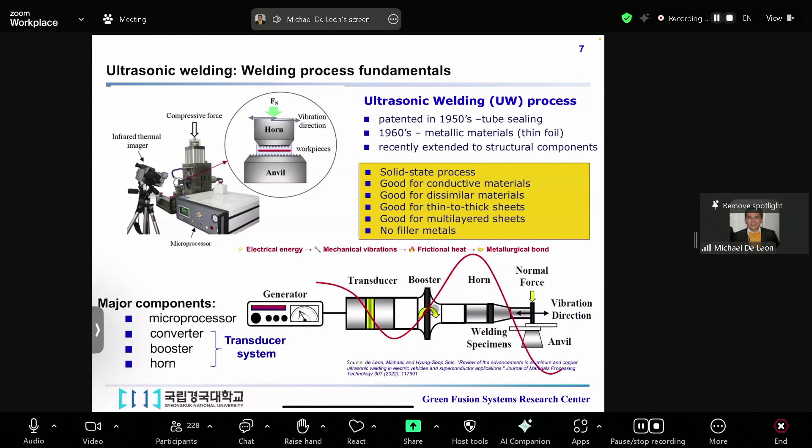The horn delivers ultrasonic vibrations with enough energy input to increase the weld zone temperature and achieve plasticization, which results in softening and simultaneous joining. After the determined welding time, the horn retracts and allows the welded workpieces to be removed from the anvil.

So in our laboratory, we are using a lateral drive ultrasonic welding machine from Kormax. We are using the time control mode. That welder has a single transducer system in which the oscillating motion is only on one side, or the horn side, and it has the capability to generate power up to 3.5 kilowatts maximum at a fixed frequency of 20 kilohertz.

So here is a sample demonstration of the process.

And that's it. You have the joint.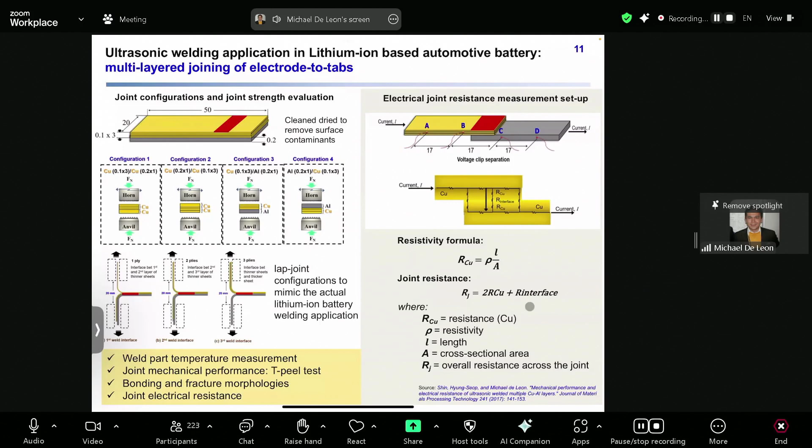So for the next joining, this is joining of tab to tab. One of the essential components in the design of a battery for electric vehicles is the cell packaging of the battery unit. There are numerous tab-to-tab interconnections in the battery unit, and for the tab-to-tab connections, it presents their own challenges.

With so many variables involved, testing every possible combination would be impractical. To address that complex challenge, we optimize ultrasonic weld quality in the battery manufacturing by implementing the Taguchi method.

Probably some of you know this method already. This is a systematic design of experiments that was developed by Dr. Taguchi, a technique that uses a modified and standardized form of design of experiment that balances efficiency and statistical accuracy, focusing on three critical parameters: welding time, vibration amplitude, and welding pressure, at three levels each.

This method allowed us to test only 9 sets of welding parameters instead of 27 sets for a full factorial design, meaning it dramatically reduced the time and resource cost.

Also, using signal to noise ratios, we simultaneously prioritize two competing objectives: the first is maximizing the mechanical strength using the larger-is-better approach, and the other is minimizing the electrical resistance with the smaller-the-better strategy.

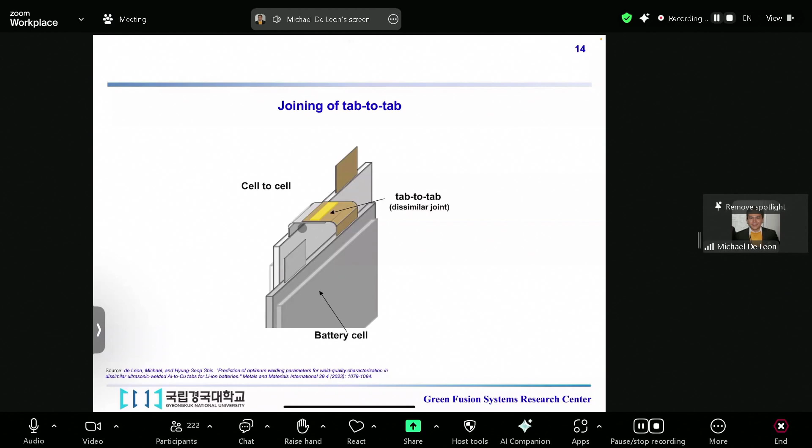Weld quality was systematically assessed through mechanical testing and electrical analysis, with the strength reduction ratio proving invaluable for rapid quality control, enabling defect detection without microscopy by comparing only the T-peel results to the lap shear results.

Looking ahead, we aim to expand this methodology to multi-layered battery stacks and integrate machine learning for real-time parameter optimization.

Moving to the last joint part, which is the tab-to-bus bar, we face new complexities. These joints must handle extreme currents while surviving years of vibration, making an appropriate evaluation technique essential for the process monitoring and improvement of these joints.

To study this, we built a custom system that monitors electrical, thermal, and mechanical performance simultaneously during testing. It gives us real-time data on how joints behave under actual operating conditions, which is a game changer for reliability testing.

Building upon our previous research experiences and advancement in ultrasonic welding research, this study introduces an integrated measurement system designed to address the critical challenge of heat generation in lithium-ion batteries. For example, heat accumulation, particularly during intense charging and discharging cycles, compromises battery efficiency, safety, and ultimately lifespan.

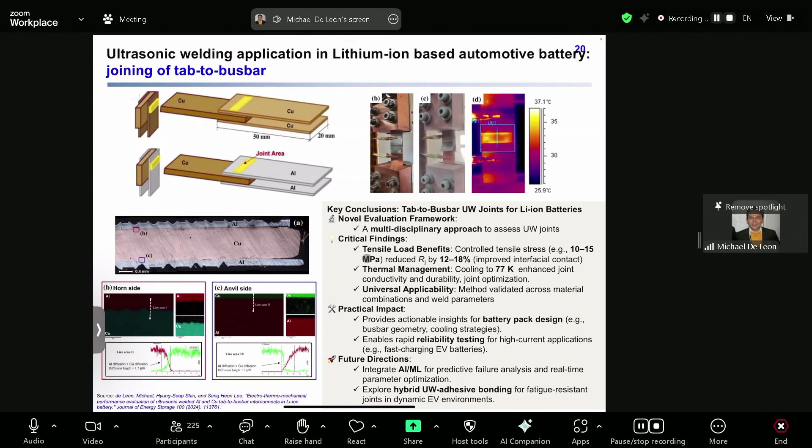Hybrid approaches are breaking barriers. By combining UW with smart interlayers, we can reduce brittle phases by roughly 30% based on our early trials. And how about residual stresses? We are developing new mapping techniques to catch microcracks before they grow.

For new frontiers, UW of ferrous to non-ferrous materials, like aluminum to steel or titanium, or even to GFRP and CFRP, are possible, along with using continuous seam welding. So those are the breakthroughs.

Sustainability isn't an afterthought nowadays. We are pioneering fully recyclable UW joints. We first did this with superconductors, and now we're moving to lithium-ion batteries.

But still, the road ahead has challenges. There is still a lack of consensus between different research groups, and standardization gaps are still here, along with energy losses. But each of these challenges represents an opportunity. With ultrasonic welding, we're not just making better welds, we are empowering the EV revolution.

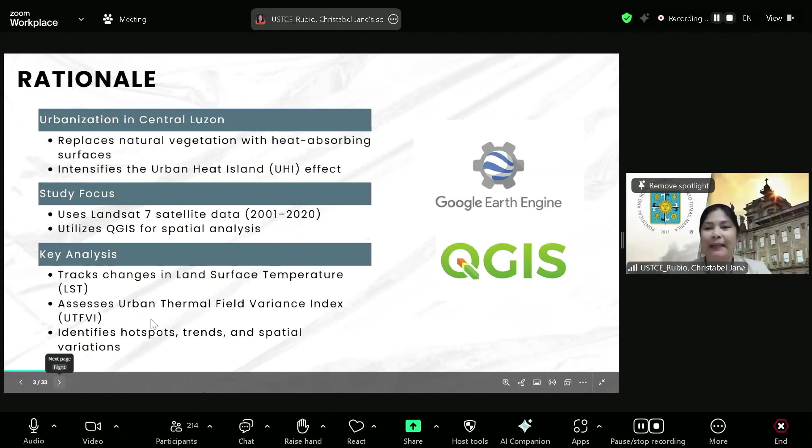So we identified several hotspots. If there are any hotspots within the region, what would be the trend in the land surface temperature and the UTFVI? And in time also, do we have more heat islands or heat hotspots within the new year compared to 20 years ago?

With this drive, our main objectives, we focus on three. We have just a year in this research. So, is there any changes in the heat island? When and where in Central Luzon do we have the highest or the lowest UHI record? And analyze the distribution and potential factors that cause high or even less UTFVI.

So our scope - I want to highlight that for this research, we use the Landsat layer from the satellite imagery, and the resolution that we use is 30 meters by 30 meters. Every pixel of the satellite imagery is 30 meter by 30 meter. Of course, in the future, we can still improve the resolution of this study.

For a quick graph of everything, so that we're not too technical, this is our framework based on our reference. So we gather the imagery from the satellite. We used Landsat 7 to be particular, and Landsat 7 has several bands starting from B1 to B7, and we particularly used the thermal band for Landsat 7.

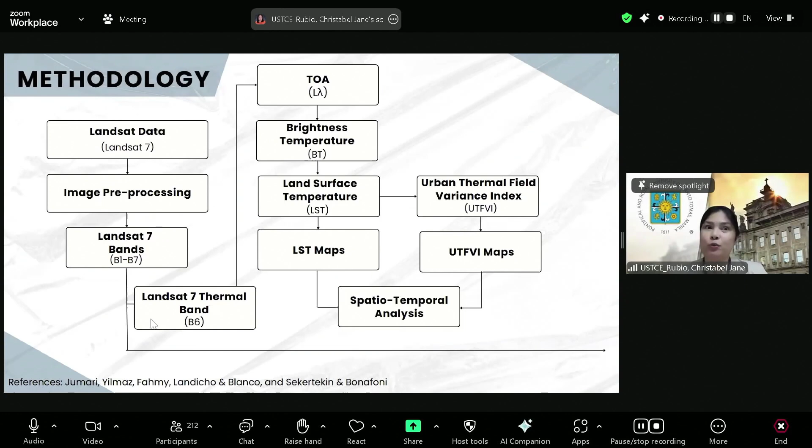Now, to support our conclusions, we tried to further process the other layers of Landsat 7. So we tried to use the land use and land cover indices inside the Landsat 7 band. We also specifically used the NDVI and the LULC - the NDVI is the Normalized Difference Vegetation Index. So vegetation index and land use land cover, for us to have a correlation of possible causes why in a specific area there would be identified hotspots.

So that's the main framework of how we performed this particular research. So the formula is very simple. We pre-process band 6 of Landsat 7, and then the LST, which is the land surface temperature for each pixel, we pre-process them to compute for or estimate the UTFVI.

Okay, with the UTFVI generated, we now have several maps for specific years. So initially, as we start this research, we had two specific hypotheses. The first one is there would be no difference between the UHI parameters, so the land surface temperature and the UTFVI. So we first hypothesized there would be no significant difference. And in fact, for the long-term trend from 2001 until 2020, Central Luzon demonstrates thermal equilibrium.

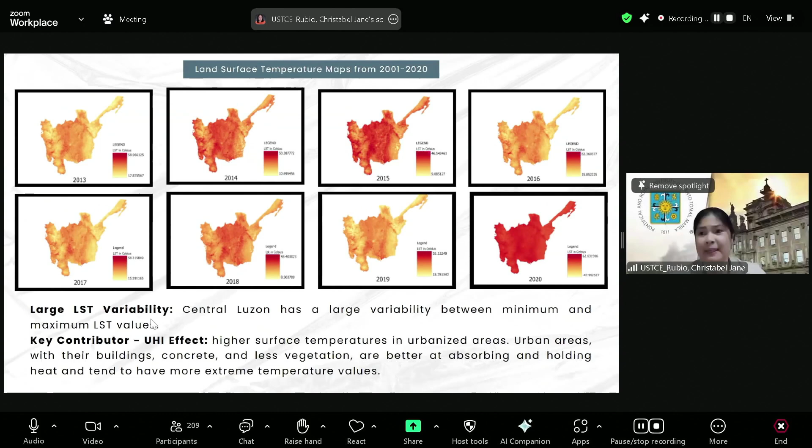From 2001 until 2020, this is the land surface temperature process from Landsat 7. As you can see, by 2020 there's a significant peak in land surface temperature. There's a very big variability of LST between minimum and maximum value depending on the year. In some years it would vary from 9 to 46, others from 15 to 66. A key contributor here would be higher surface temperatures in urbanized areas, because of the buildings and concrete, and then there would be less vegetation.

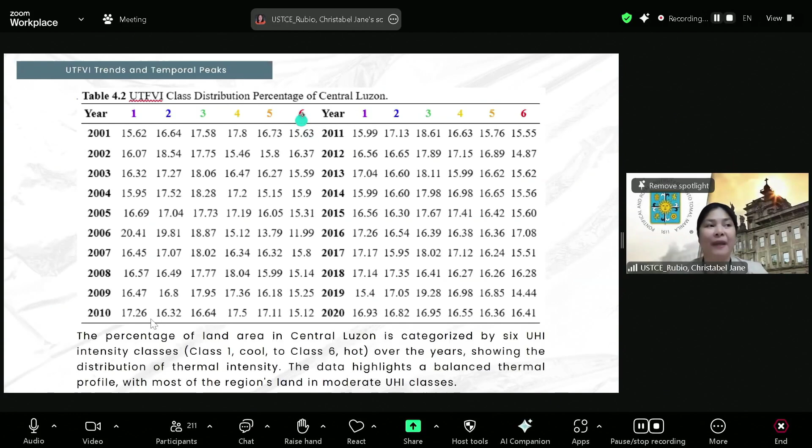We tried to classify the LST and the UTFVI into 6 categories. Category 1 is not alarming, and category 6 is identified as hotspot. So if you see a red value in the map, that means that area would be considered a hotspot, or with very, very high intensity. This shows the distribution of the 6 categories.

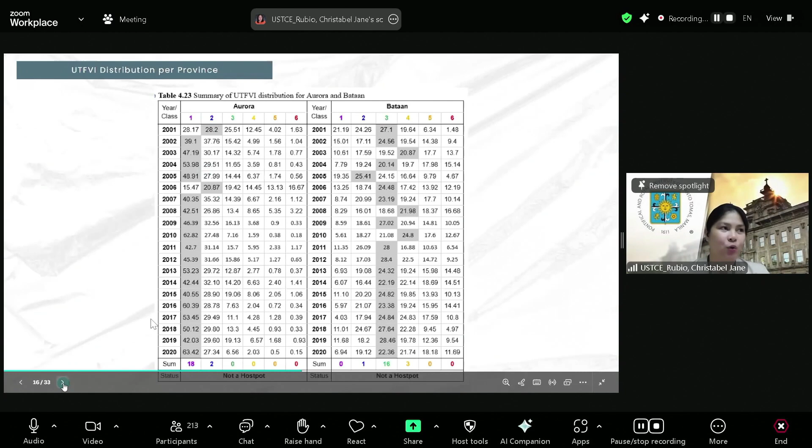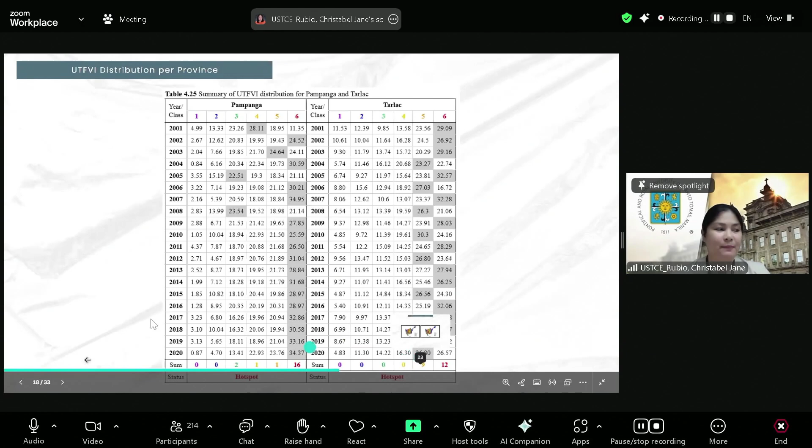Now maybe we can dwell into Aurora province. Gladly, Aurora province is not qualified as a hotspot, although there are areas under category 2 that are still not alarming, compared to Pampanga. If you can see, the majority of the area in Pampanga falls under number 6, or very, very high heat, urban heat intensity, so it's identified as a hotspot, similarly with Tarlac. And Zambales is also not a hotspot. This is the distribution map of the 6 categories from 2001 until 2020. Luckily, our province is still within the minimum category, not so alarming.

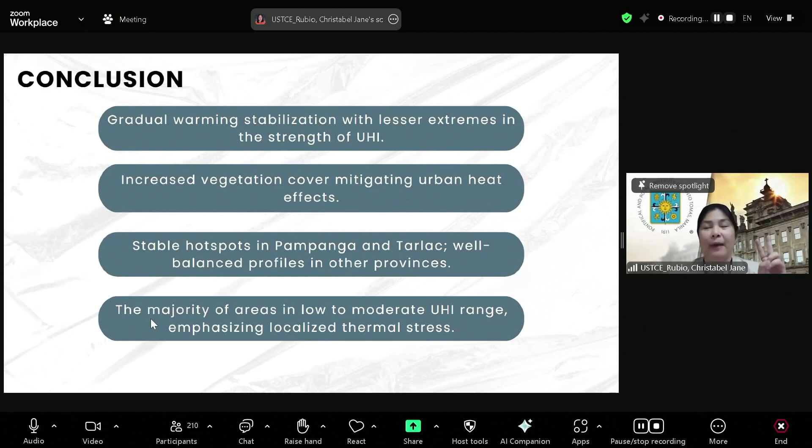So although the majority of the areas are under low to moderate UHI range, our study has identified 2 provinces under high UHI category 6, considered as hotspots. So maybe that's all for my research. I am now ready to take questions.